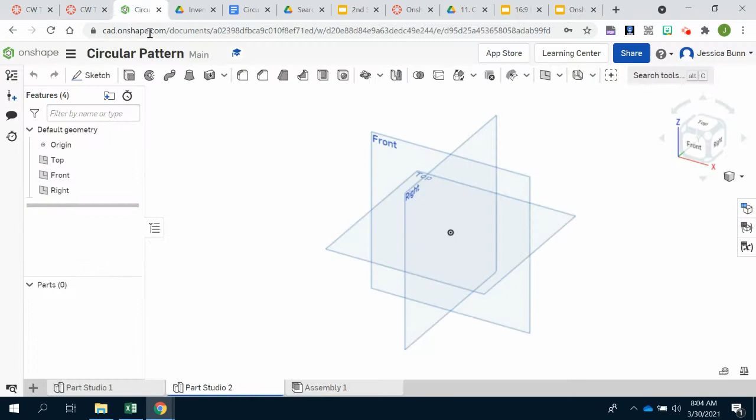So we'll come over to Onshape. We'll start a sketch on the front surface, changing the orientation to the front view and creating a circle with a diameter of 6. I'll then add another circle with a diameter of 2, and then we'll finish that sketch.

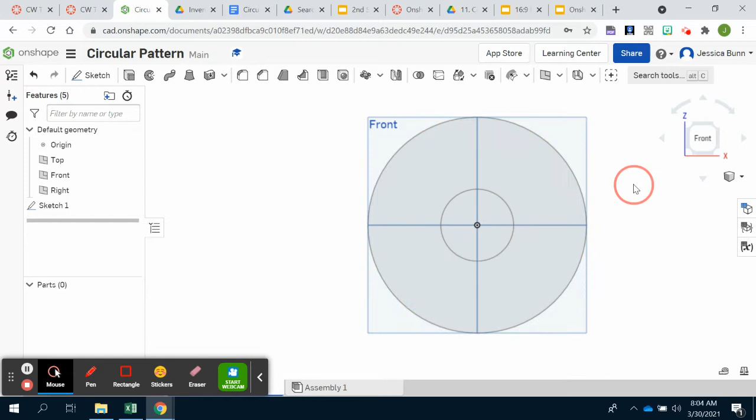I'm going to zoom out and rotate so I can see everything, and we'll extrude this shape for a distance of 0.5, making sure that it did remove the center, like this. We're then going to place a point on this front surface to drill a hole, and then we'll use that hole to create the pattern around.

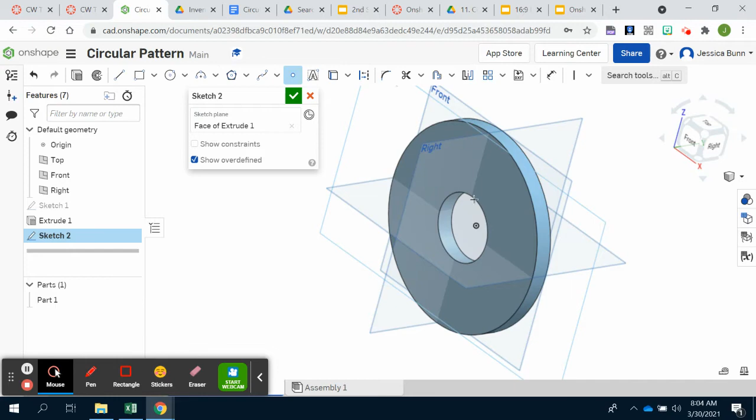So I'm going to start a sketch here on the front. I'm then going to add in a point, making it vertically aligned with this right there. And then I will dimension this to be 2. Make sure this point here and this center point are vertically aligned. If you need to add a vertical constraint, you can do that, and then click your green check to finish the sketch.

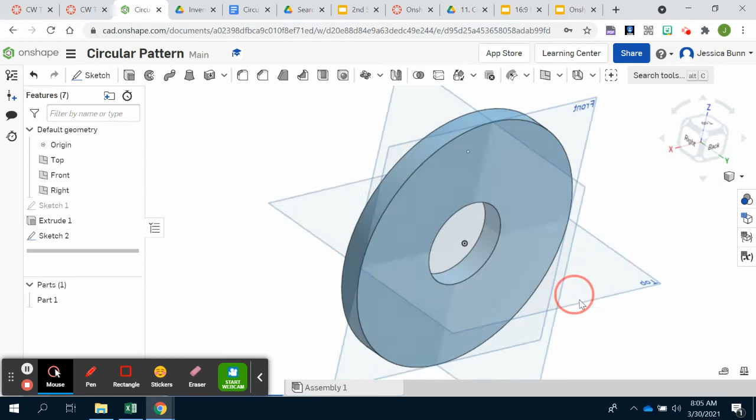I'm then going to drill a hole using this point. We want it to be a simple hole that goes all the way through with a diameter of 0.75. Click your green check and it should look something like this. We're then going to use this hole to create a circular pattern. We want there to be 6 holes in total whenever we're finished.

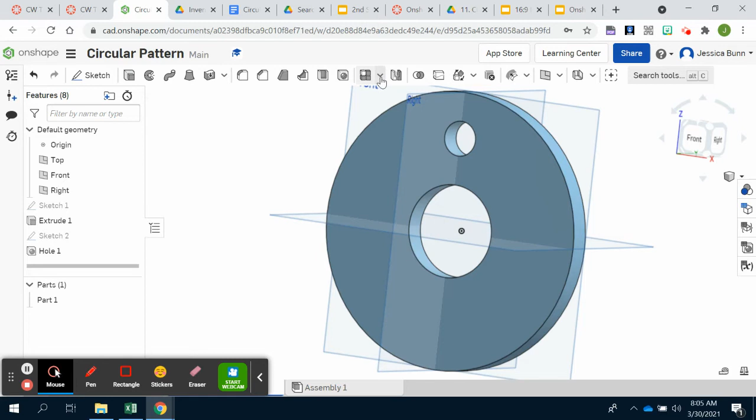So we will click circular pattern. If you don't have this here, you can find it underneath the linear pattern option. So if yours looks like this, just click the drop down box and then choose circular pattern. We want to choose the hole. It may be a little difficult to click on it, or at least mine was.

And you want your axis to be any of these circular edges. You really can use any edge, but since we don't have a work axis, you'll have to find an alternative. So something like this, and then I'll go back and it should populate. There we go. So if you just click around, it will eventually work.

And then you want your angle to be 360, meaning we want it to go all the way around. If you only wanted it to go halfway, you could change it to 180, but we do want it to be 360. And then we want 6 holes in total, including the original one. So change that number to 6. You'll see it looks like this, and then click your green check.

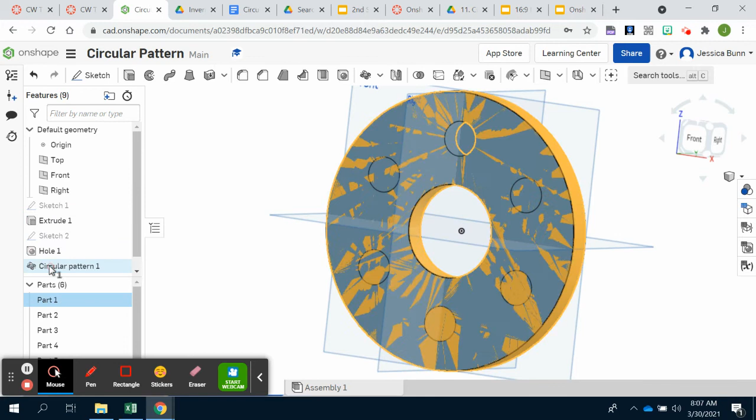If you ever need to go back and edit anything, you can always double click here. And as you can see, mine didn't remove the holes, it just kind of filled them in. So I'm going to choose remove instead. That didn't work.

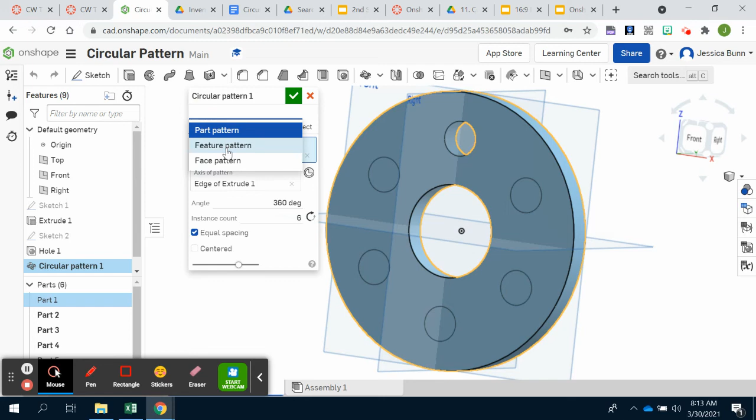Now, if yours does the same thing, it's because we didn't choose the correct circular pattern. So again, if you need to go back and edit something, you can double click here. And notice we are under part pattern, not a feature. So if you change that to a feature, you should then be able to select just the hole, and then the axis selects itself, and then click your green check, and now you have a successful pattern there.

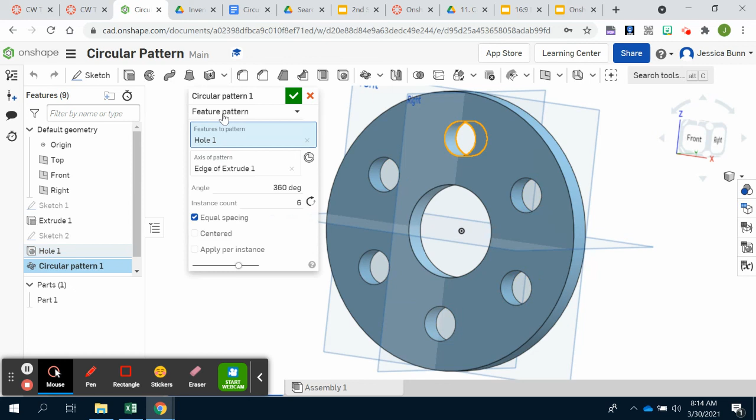So if yours didn't work the first time either, it is simply because we didn't change this option here to feature pattern instead of part. Once you get the pattern there and completed, you can click your blue share button and insert your link into the assignment.